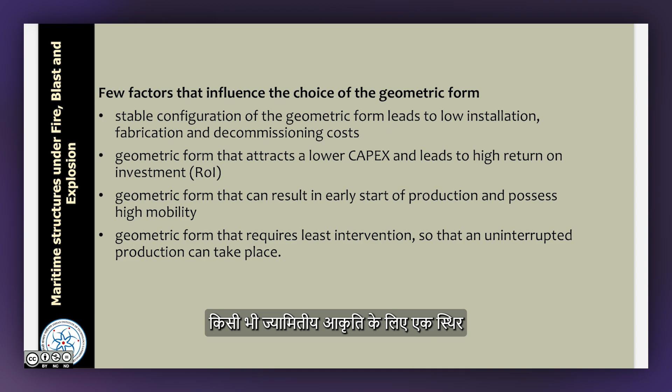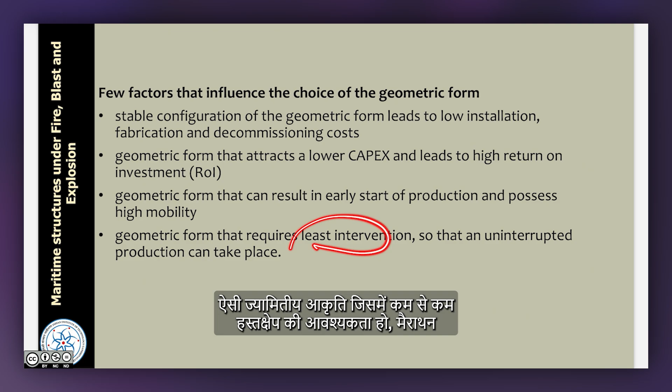Let us see which factors influence the choice of the geometric form. A stable configuration is one of the primitive requirements of any geometric form, as this helps reduce installation, fabrication and decommissioning cost. Geometric forms that attract lower capex, that is capital investment, lead to high return on investment. The geometric form should result in early start of production and possess very high mobility. A geometric form that requires least intervention should be one of the best candidates for maritime structures.

Structures are designed to remain insensitive to lateral loads. Ideally, hypothetically, I want a system which does not respond or reflect any reaction forced upon it by wave and wind loads. So the action of lateral loads arising from wave, wind, current and earthquakes should not bother my structural form in terms of design at all.

Hypothetically that is what I want, but compliant platforms are expected to resist these loads using both material strength and structural redundancy. Please pay attention to this term redundancy. These structures are highly statically indeterminate and redundant. So the design approach has shifted from strength based design, which permits very low displacements, to form dominant design which permits large displacement.

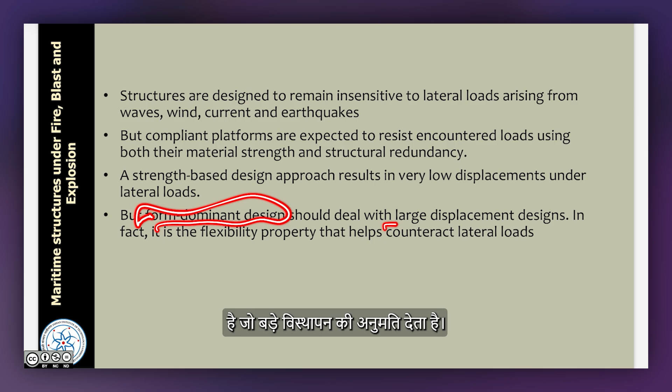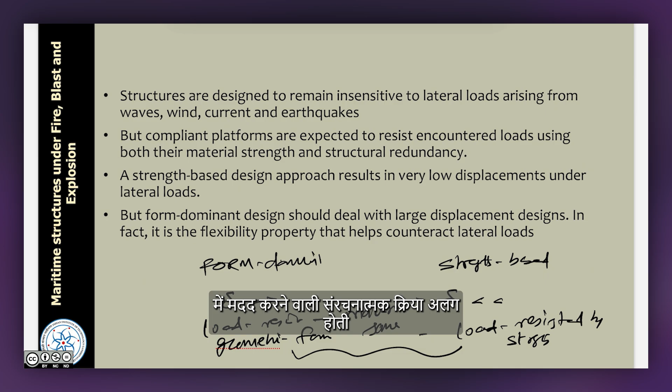So in principle, let us compare form dominant design to strength based design. In strength based design, displacements are very minimum; in form dominant design, displacements are actually larger. In strength based design, load is resisted by strength. In form dominant design, load is resisted essentially by the arrangement of members, which we call geometric form. In both cases the material may be the same, but the structural action which helps the system counteract the loads is different: here it is geometric form, here it is strength by material and member cross section. Therefore, we can say these structures are highly structurally redundant.

Compliant platforms are permitted to undergo large displacements, but they are position restrained using cables or tethers, because you need to hold the platform in place to perform its operation. You cannot allow the platform to keep freely floating. Even drill ships and semi-submersibles used for oil and gas exploration are anchored to the bed, during operation, using either dynamic positioning systems or other ways by which they are fixed to the seabed. They need to stay in position at a specific geographic location if they want to perform operations such as oil and gas production, drilling, and exploration drilling.

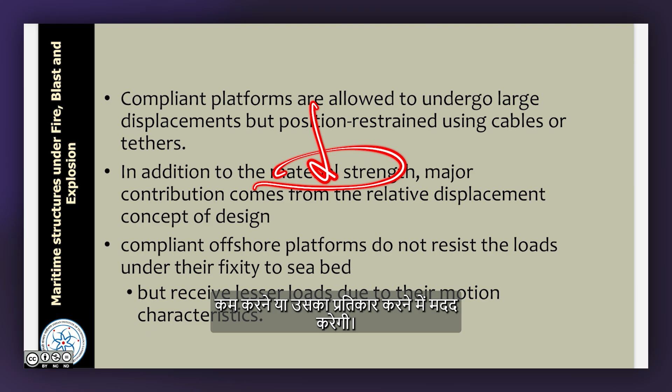So therefore, compliant platforms receive material strength which helps them alleviate or counteract the loads, but the major contribution essentially comes from the relative displacement concept of design.

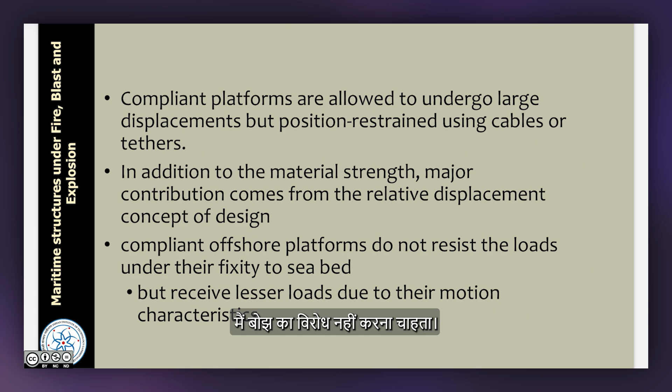However, this relative displacement cannot go to infinite value. So you have to control the displacement within the upper limits, but still the relative displacement concept which is permitted in the design is now governing the design. Therefore, in summary we can say compliant platforms do not resist loads by fixity to the seabed, but receive lesser loads due to their motion characteristics. So, very interesting - I do not want to resist the load, I want to receive lesser load. That is a design concept now.

So compliant platforms are position restrained by cables or tethers. These cables are highly pre-axially loaded tethers which offer resistance to lateral loads while counteracting the buoyancy force. Therefore, strength based design is shifted to displacement controlled design. Large displacements allowed in the design form result in necessity of recentering capability of the platform.

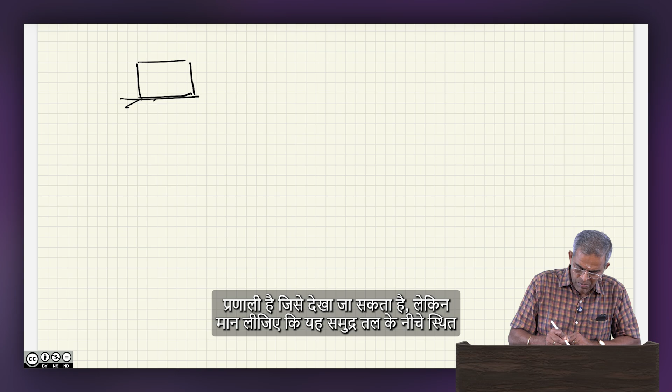So let us say what is recentering. Let us take two concepts. One, I have a structural system which is founded to seabed. Other one is a system which is floating but anchored to seabed. This is floating but anchored to seabed. This is fixed to seabed.

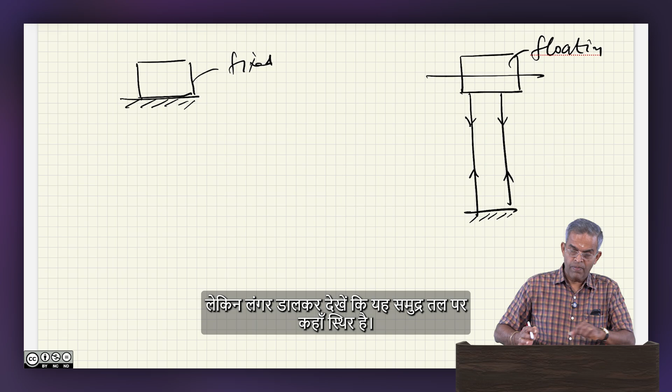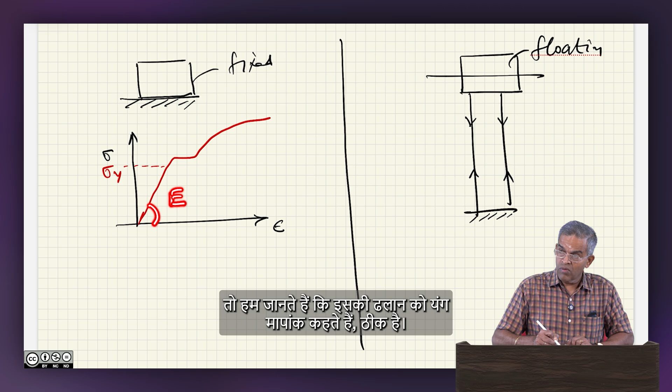Let us say I use steel as a construction material. Let me draw the stress strain curve of steel. Let us say up to this limit, I will restrict the applied stresses in the design. So we can call this value as yield strength. You will notice that the initial portion of this remains elastic - it is a straight line. So we know the slope of this is called Young's modulus. This is elastic initially, it is a straight line, linear.

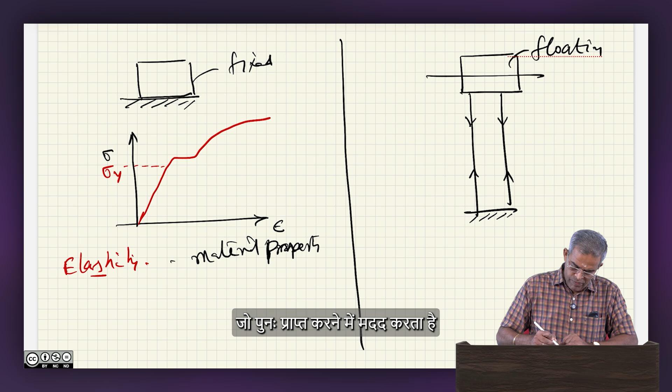So elasticity is a property of the material which enables its original shape and size regain upon removal of load. Let me write that: elasticity is the property of the material which helps to regain its original size and shape upon removal of load.

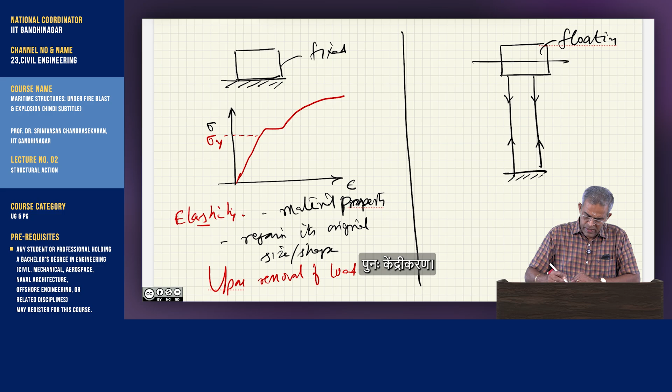Whereas recentering is a geometric property, rather system property, which helps to reach its equilibrium position in the presence of load. So very interesting friends - one is in the absence, other is in the presence. One is a material property, other is a geometric property. This is applicable to floating structures, this is applicable to fixed structures.

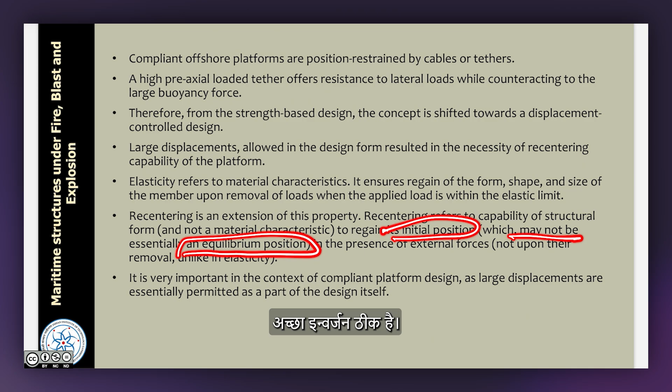So elasticity refers to material property which ensures regaining original form, shape and size upon removal of load. This is true only when the load is applied within elastic limit of the material, that we understand. Recentering is an extension of this property. Recentering refers to capability of the structural form, not the material, to regain its initial position, which may not be static equilibrium position - dynamic equilibrium position - in the presence of external forces, not upon the removal like elasticity. So one happens in the presence, it is a geometric property, other happens in the absence, which is a structural property or material property. Two things are different.

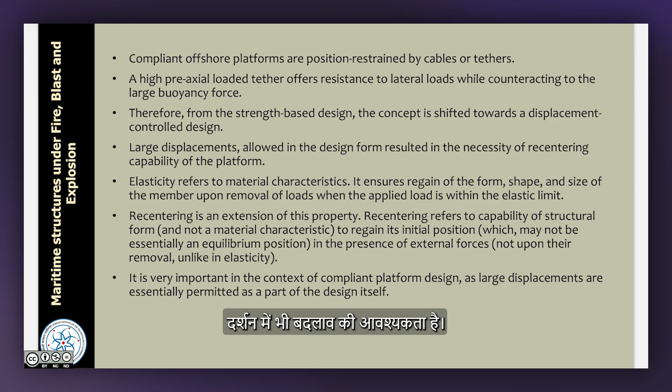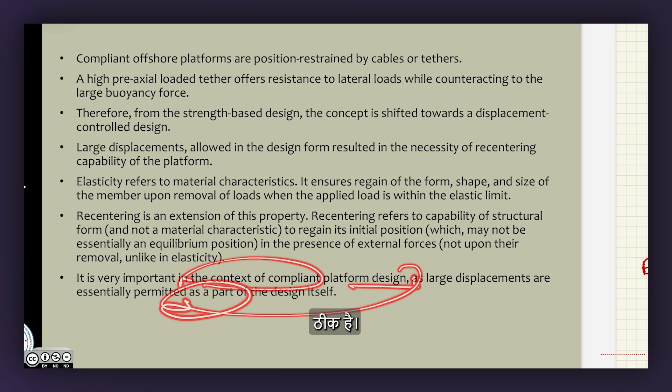So therefore, the design philosophy which is now dependent on structural action has also need to be different, they cannot be same. In the context of the design, it is very important to learn that compliant platform design permits large displacement, therefore that should be an integral part of the design itself. Recentering enables safety existence of other appurtenances such as auxiliary fixtures, risers, pipelines, electric cables, umbilical etc., which are connected to the platform. One of the fundamental differences between elasticity and recentering is that elasticity is material property, recentering is geometric property. So in form dominant design, recentering becomes very important as we go ahead.

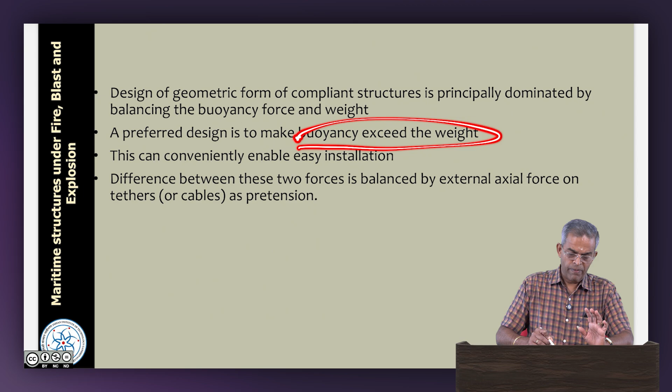So design of geometric forms, therefore in principle, is dominated by balancing the buoyancy with the weight. A preferred design is to make buoyancy exceed the weight, what we call positive buoyant systems. This can conveniently enable very easy installation, therefore the cost of installation can be significantly less. The difference between these two forces, that is buoyancy and the weight, is compensated by axial pretension in the cables. So tension leg platform design is essentially based on this focus.

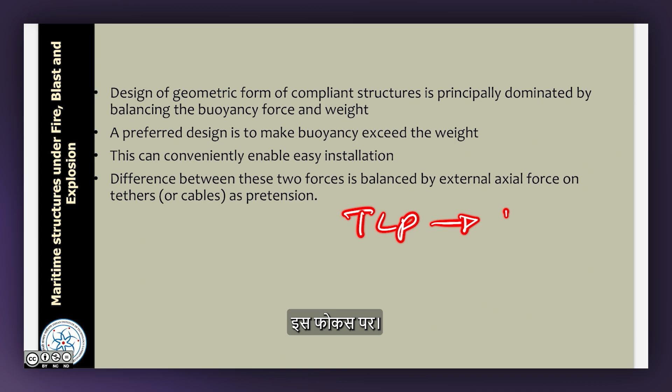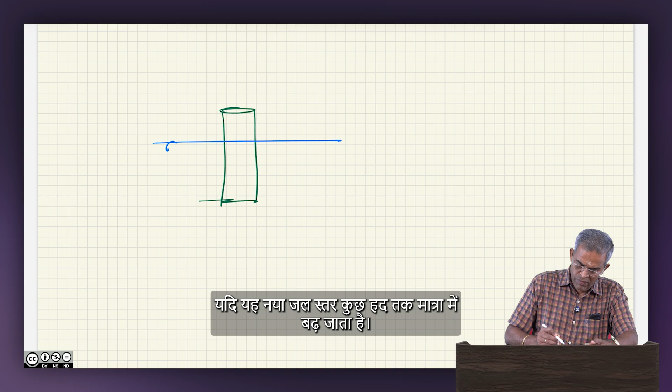Large displacements now invoke added mass presence in the body. What is added mass presence? Let us say when I have a cylinder, if this be water level, this becomes a submerged volume in the cylinder. When the cylinder is moving, let us say it takes a new position like this.

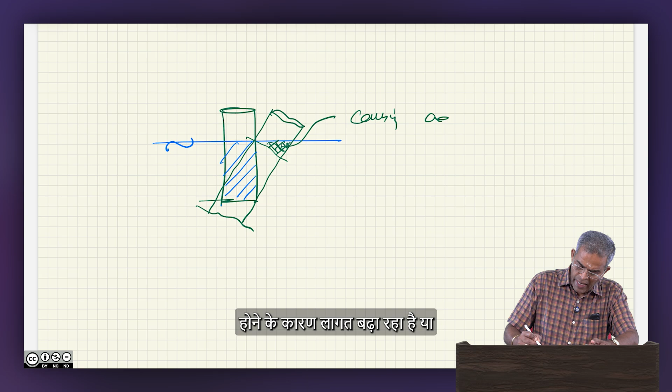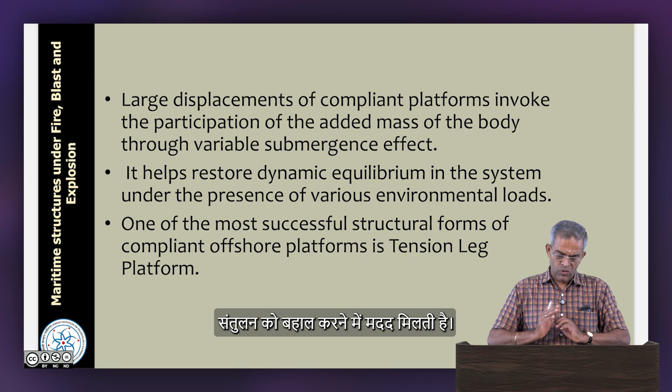This additional submerged volume is now causing added mass, because there is an additional submerged volume, and we know the mass is proportional to this submerged volume. So this additional submerged volume adds additional mass to the floating system. This added mass will be an additional feature called the variable submergence effect. This helps to restore the dynamic equilibrium of the system in the presence of forces. One of the most successful structural forms of this is the tension leg platform.

Having said this, let us move on to the structural action of different kinds of platforms. Let us take jacket platforms. We already said jacket platforms are transparent to wave and wind action. Only the members will attract forces, but the forces will pass through the gap between members. Therefore, the overall attraction of forces is lesser. The platform resists the loads by stiffness and strength, not by motion. That is jacket platforms.

Let us look at the load transfer path. When the load caused by wave, wind and current acts on the platform, the load has to go to the deck. From the deck it goes to the jacket legs, and from the legs it goes to the pile. Load has to go to the members and the pile. That is the load path.

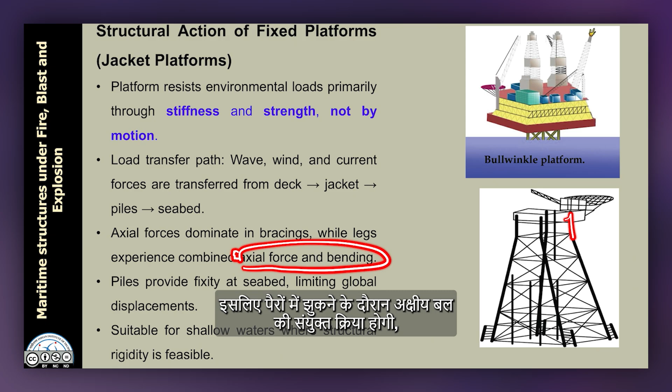Axial forces dominate in bracings, while the legs experience a combined action of axial force and bending. So the legs have combined axial force and bending, whereas the braces predominantly carry axial forces. Piles driven below provide fixity of the legs to the seabed, and therefore limit displacements. These platforms are suitable for shallow waters where structural rigidity is feasible.

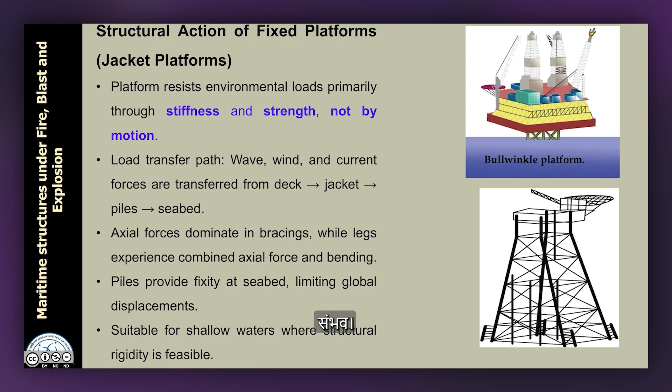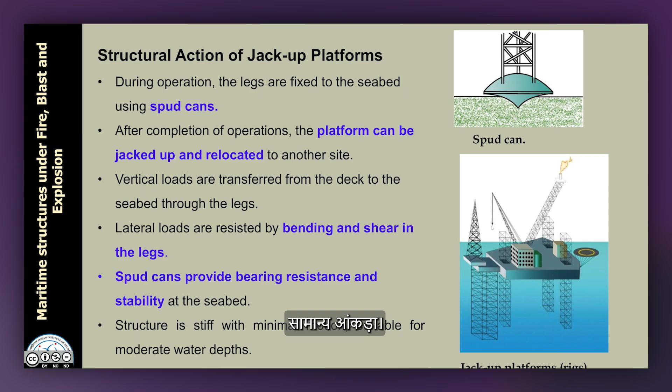Let us talk about jack-up rigs. A typical figure you see here is a jack-up rig. This is the deck which has got all appurtenances and facilities used for oil and gas exploration. When it looks like a vessel or a ship, let us say when a jack-up rig is sailing, all these legs will be kept up. That is why it is called jack up. When they reach their site, these legs will get into the water.

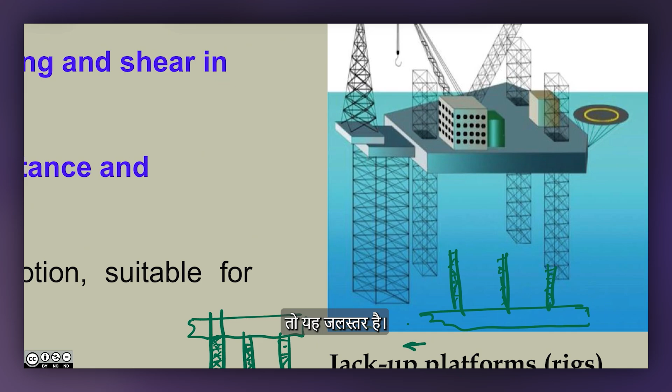So this is the water level, the still water level. What happens is, by pushing the legs down, the deck will be lifted up - that is why it is called jack up, jack up platforms. The top side contains all facilities which are very common for every offshore platform.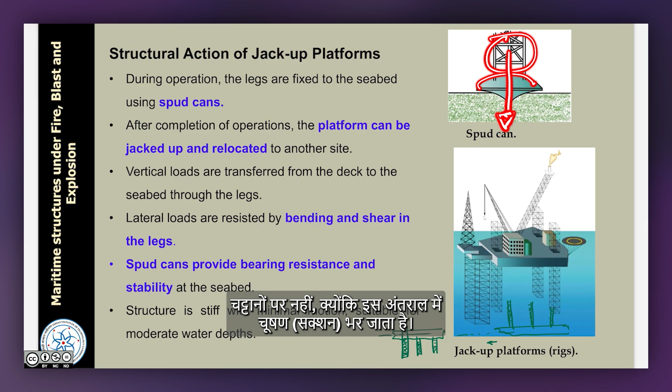So jack-up rigs essentially resist the loads through the foundation called spud can. A spud can looks like an inverted cone. What happens is this leg with the spud can is pressurized into the sand or clayey soil, not on rocks. Because of suction filled in this gap, it holds the platform. So they are fixed to the seabed using spud cans, whereas gravity platforms are fixed to the seabed by their own colossal weight, whereas jacket platforms are fixed to the seabed using piles. See the foundation difference.

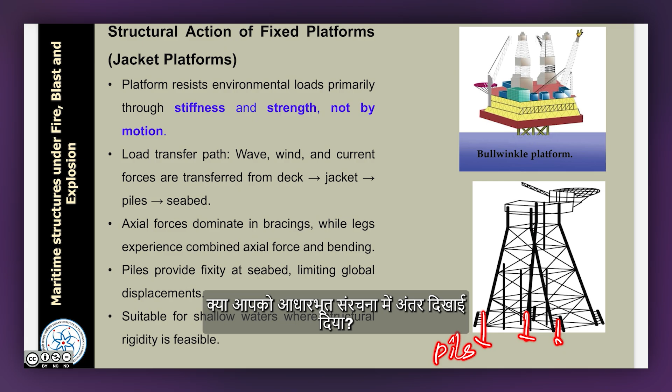So, when they move to the site, the platform is jacked up to the site. Once the operation is completed, the legs are drawn up like this and the platform is sailed to the next location.

Vertical loads of the deck are transferred to the seabed through the legs. That is the load path. From the legs, it goes to the spud can and then to the soil. Spud cans provide bearing resistance and stability at the seabed.

Let us talk about a compliant platform in general. Compliance means flexibility. This is one of the compliant platforms, where the substructure consists of a tower.

We can also connect guy wires to the tower to resist its motion, then we call this a guyed tower.

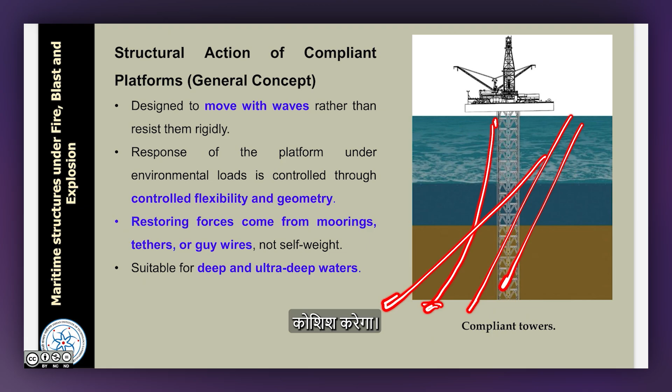They are designed to move with the waves rather than resist them rigidly. For example, if this is fixed to the seabed by a hinged connection, then when the platform swings because of wave action, let us say I have a guy wire here. When the platform moves to the right, this guy wire tries to pull it back. When the platform swings to the left, this guy wire pulls it back. So, recentering is automatically obtained by the design.

The response of the platform under these loads is controlled by flexibility and geometry. The restoring forces come from mooring lines, guy wires, or tethers, not from the self weight. Whereas in this platform, the restoring force comes from the self weight.

These towers are suitable for deep and ultra deep waters. One of the compliant towers is called the articulated tower, where the bottom is like a hinged connection called articulation.

Articulation is a hinged connection capable of rotating 360 degrees like this, but it cannot move in any degree of freedom, only rotation is allowed. This is called articulation. The typical articulation is seen here, which is otherwise called a universal joint.

This platform has two chambers called the ballast chamber and the buoyancy chamber. Ballast chamber improves stability, buoyancy chamber improves recentering of the platform. So, the tower is connected to the seabed using a universal joint.

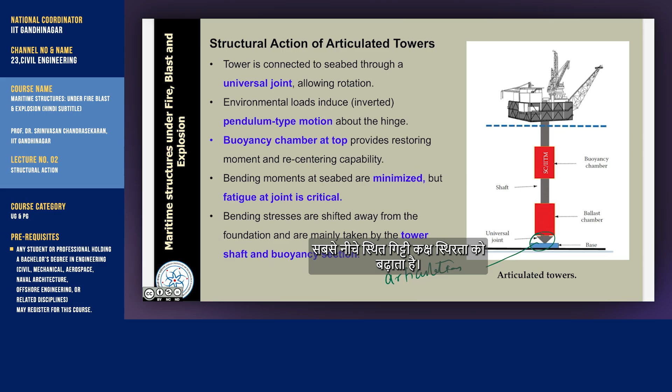Environmental loads acting on this are resisted by an inverted pendulum action, like a pendulum inverted. So this keeps dancing like this and it alleviates the loads. The buoyancy chambers on top provide recentering capability; the ballast chambers at the bottom improve stability.

Bending moments at the seabed are minimized because there is a hinged joint here; the bending moment at this joint is practically zero. The only issue in this kind of design is that the platform undergoes continuous motion, so this hinge will be subjected to fatigue failure.

So, we also have to learn about the fatigue method of design for these structures. Bending stresses are shifted away from the foundation and are now taken up by the tower and the buoyancy section respectively.

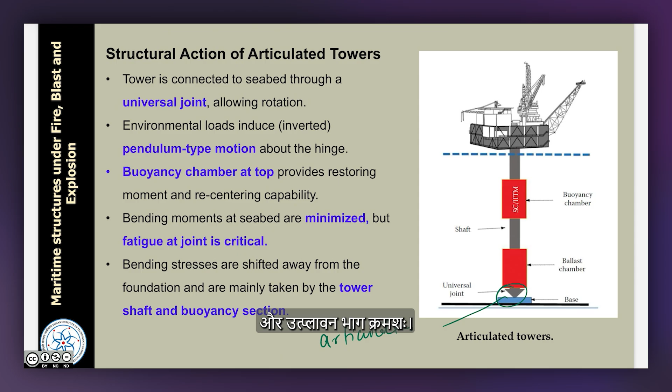Let us talk about the tension-leg platform. It is again a floating system anchored to the seabed using tethers. The design concept is that buoyancy exceeds the weight.

Buoyancy exceeds the weight. So weight acting downward plus T naught acting downward, buoyancy acting upward will be resisted by W acting downward plus T naught acting downward. So buoyancy exceeds the weight, therefore the axial tether tension T naught balances that difference. Excessive buoyancy is now balanced by axial pretension in the tethers.

Look at the structural action. If I have a system connected to the seabed using tethers, with axial tension in the tethers, and this is my still water level, when the platform moves or swings to the right...

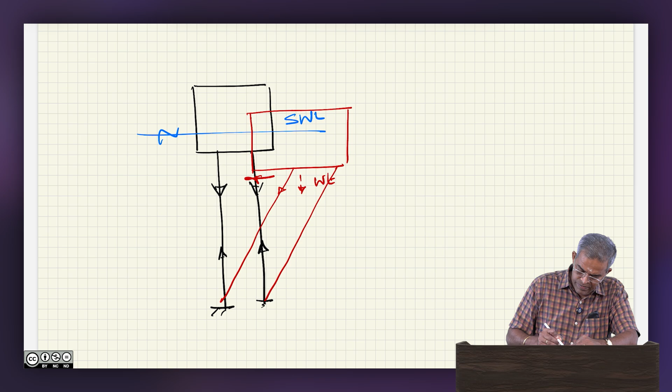If the platform moves to the right, tethers remain in the same position. If they are axially pretensioned, the vertical component adds weight, and the horizontal component pulls the platform back. So recentering is automatically done by the design.

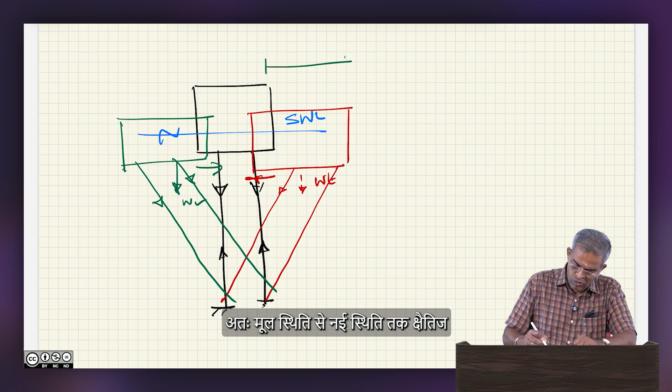So, the shift from the original position to the new position in the horizontal direction is called offset. The shift from old to new position in the vertical direction is called set down. Offset happens in surge or sway degree of freedom, set down happens in heave degree of freedom.

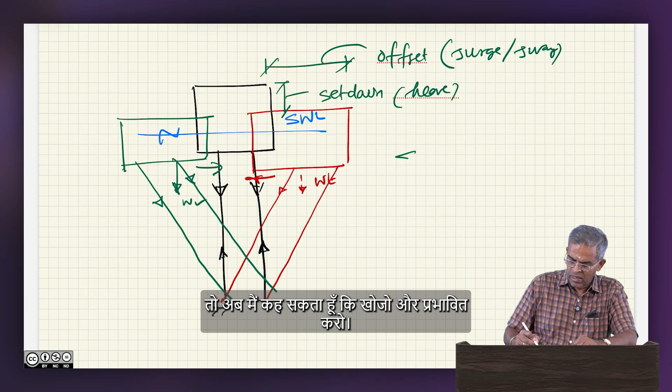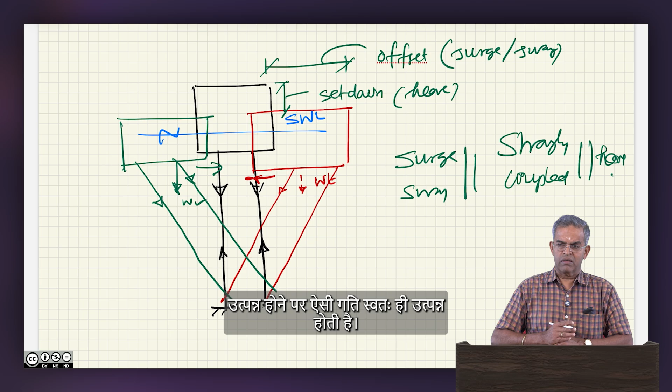So now I can say surge and sway degrees of freedom are strongly coupled with heave degree of freedom. So there is a coupling motion. When you give surge motion, heave automatically occurs; when you invoke heave motion, surge automatically occurs. This coupling action enables recentering and helps to counteract the forces. This is what we call TLP mechanics.

TLP mechanics has vertical downward movement called set down and horizontal movement called offset. They are strongly coupled. Heave, pitch and roll are stiff degrees of freedom, whereas surge, sway and yaw remain flexible. As discussed earlier, please refer to the slide. A structure that has both degrees of freedom combined is called a hybrid structure, so TLPs are called hybrid platforms.

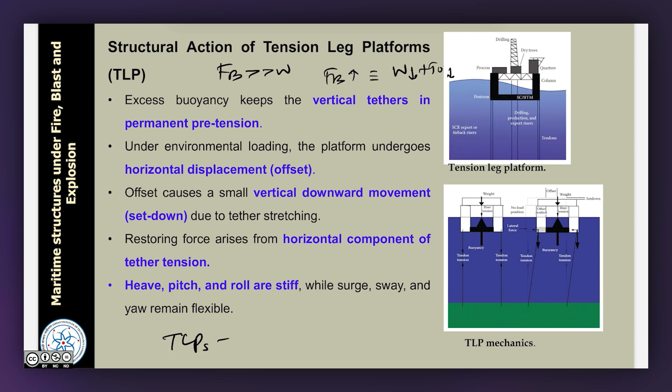Let us talk about the spar platform, a single point anchor reservoir. Spar has a substructure different from TLP. In TLP we have only tethers, whereas in spar we have a column member, which we call a deep draft chamber. Stability is achieved by this deep draft chamber and low center of gravity.

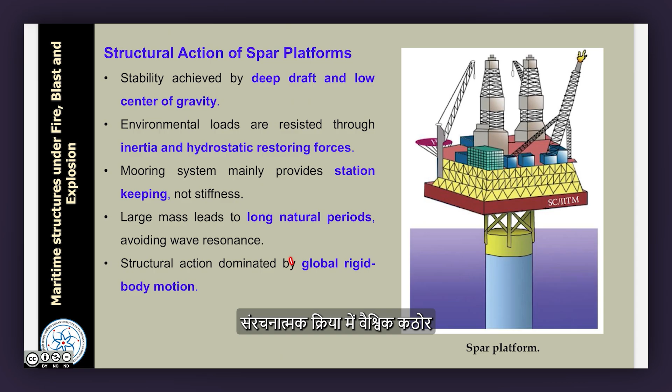Environmental loads are resisted through inertia and hydrostatic restoring force. Mooring system mainly provides station keeping, not stiffness, whereas in TLP the mooring system provides stiffness also. Here it only offers station keeping. Large mass on the top side leads to long natural periods, which avoids wave resonance. Structural action is dominated by global rigid body motion.

Let us look at the semi-submersible platform. Semi-submersibles are also one of the platforms used for oil and gas exploration. It has reduced waterplane area, which minimizes the wave induced forces. Loads are transferred through the column members and the pontoons to the mooring system.

The platform relies on hydrodynamic transparency rather than stiffness. The design concept has moved from strength based, stiffness based material characteristics to total geometric form, which comes from floating platforms like semi-submersibles. The load is resisted purely by hydrodynamic transparency and not by stiffness. Response is generated by the coupled heave, pitch and roll motions. Mooring lines ensure position keeping and not rigidity. One important problem with this kind of structure is fatigue because of cyclic waves on the vessel or on the drill ships.

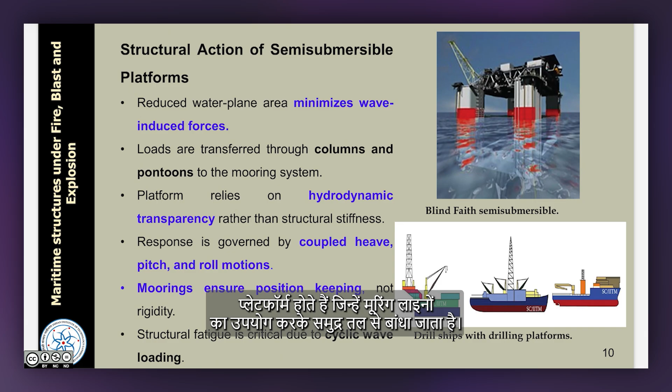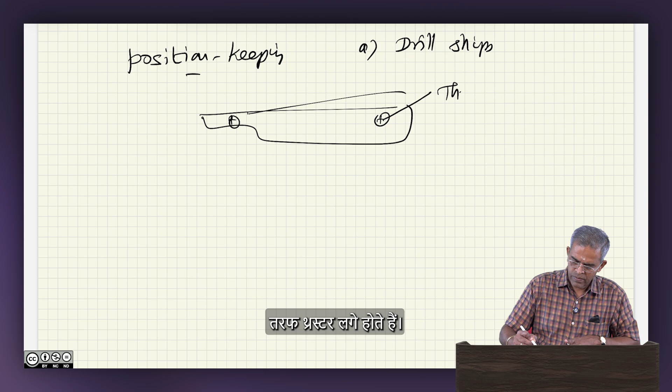Drill ships and semi-submersibles are completely floating platforms which are anchored to the seabed using mooring lines. When you look at the method of anchoring them, let's say position keeping, consider drill ships. They have thrusters in the fore and aft of the vessel, in the direction of motion of the vessel.

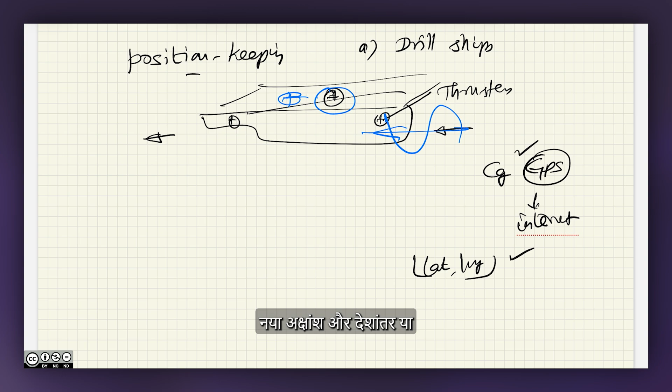On the deck they have a global positioning system fixed, which is connected to the internet. So when the platform moves, the latitude and longitude coordinates of this point are known. Further, under wave action, if the platform moves, this center of gravity moves to a new point, and the new latitude and longitude are known. The difference between delta x new to delta x old, delta y new to delta y old is computed, and the thrusters will apply forces to push or pull the drill ship to the new position.

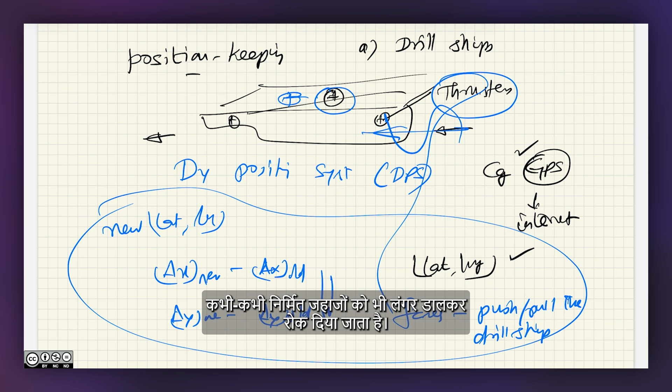This arrangement is what we call a dynamic positioning system, in general DPS. Sometimes drill ships are also anchored using mooring lines; they can also be used. However, to facilitate the operation of drilling, drill ships must be position restrained either using a DPS or using mooring lines. So the alternates are DPS or mooring lines.

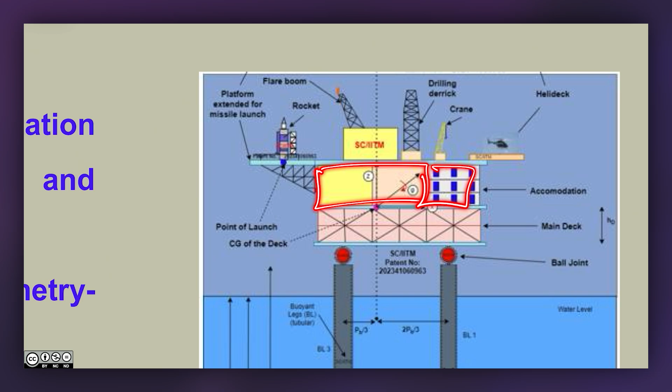Let us look at the last one, a new generation platform called Triceratops. Interestingly, look at the platform: the top side has all the facilities an offshore platform should have, for example a drilling derrick, a crane, a helipad, a flare boom, living quarters and accommodation, then the main deck which has electromechanical equipment, compressors, machine room, etc, and a drilling derrick used for drilling operations. So the top side is almost the same as that of any platform.

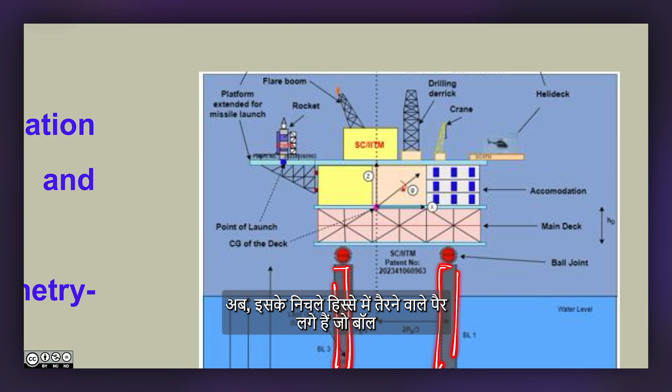The bottom has buoyant legs which are connected to the top side using something called a ball joint. The advantage of the ball joint is that when the platform is rotating under wave action, this rotation at the legs will be absorbed by these ball joints and not transferred to the deck. Under wind action, if the platform is rotating, these ball joints will absorb the rotation and not transfer it to the legs. So the moment at this connection practically becomes zero, or rather equal to some value m star, for which these joints are designed.

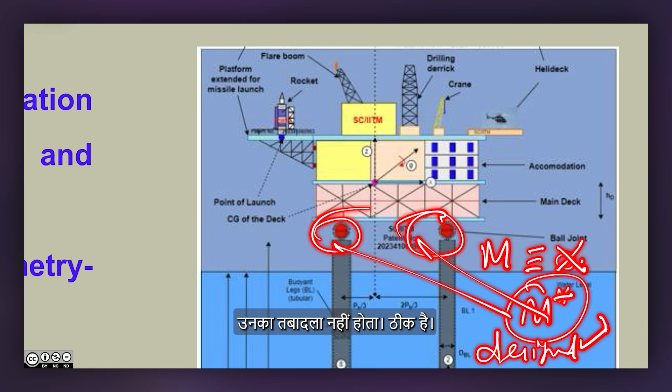They are not transferred. So we can say the Triceratops is an example of a partially isolated system. Why partially, not completely? Because any surge motion or heave motion will be transferred from the leg to the deck and from the deck to the leg.

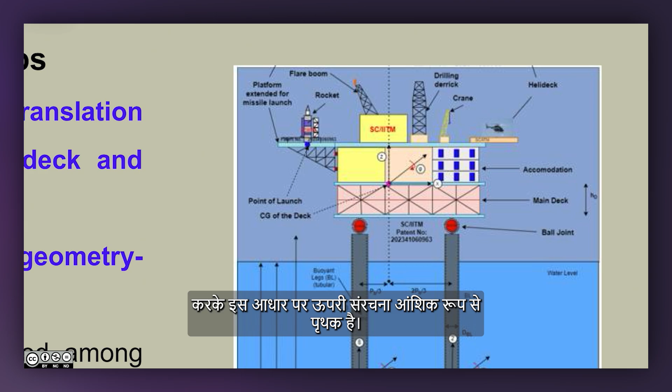So the restriction is not on displacement degrees, but only on rotational degrees. Therefore, the superstructure is partially isolated from the substructure using ball joints, which allow translation but isolate rotation. The structural action of this platform

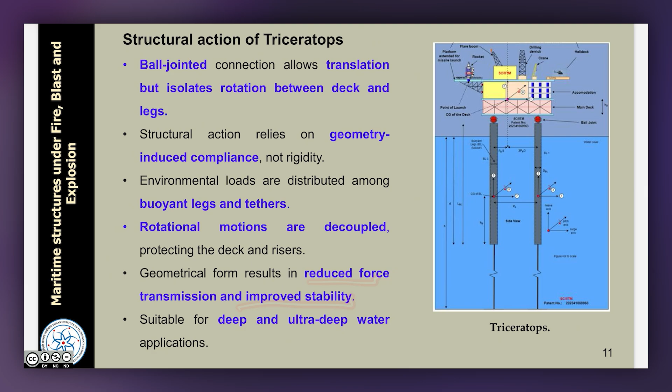essentially depends on geometry induced compliance, not on rigidity. The loads acting on the platform are taken care of by the buoyant legs and the tethers. The rotational motions are decoupled, which helps protect the deck and the risers. This geometric form results in reduced force transmission and improved stability of the platform.

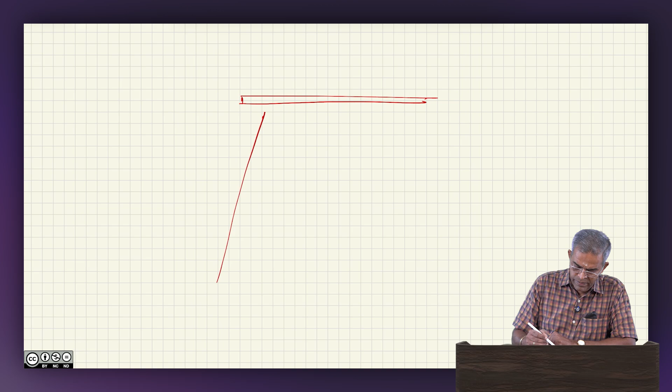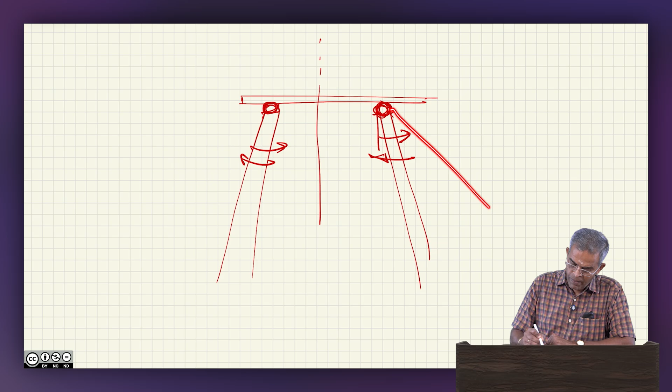Like for example, if I have a deck and a buoyant leg connected by a ball joint, with respect to the CG, the legs have freedom to move or rotate inward and outward. If they rotate too much, the stress at this joint will become beyond its design capacity. Therefore, they need to be supported.

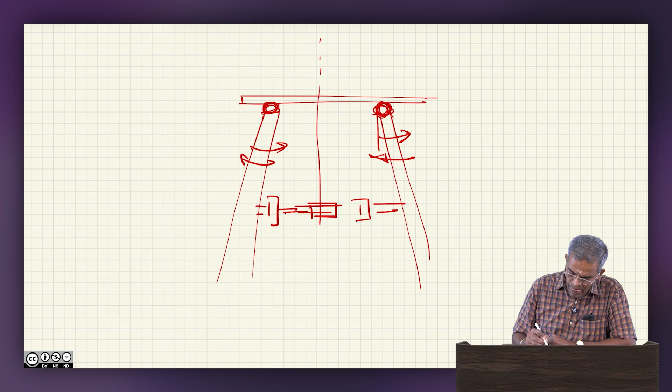So what we do is interconnect these legs by a central system, and in this system we introduce a spring mass damper. These passive dampers will restrict the outward swing of these legs. So they are called response control mechanisms, which you see here.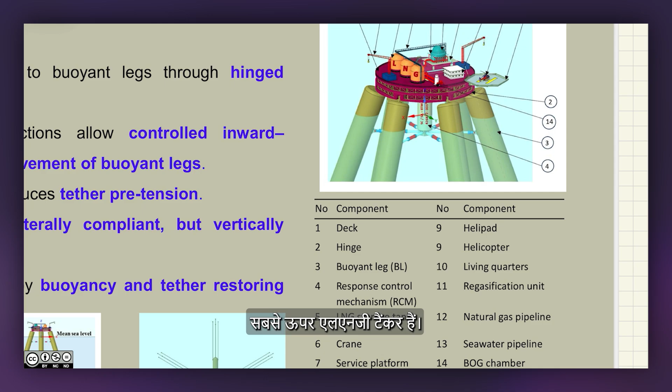This platform also holds the LNG tank on top, the LNG tankers on top, a crane, helipad, living quarters, flare boom, and also the regasification unit. All these are housed on the topside of the deck, and the deck rests on the hinged joints which are mutually connected between the leg and the buoyant legs.

It is again a classic example of a partially isolated maritime structure. The hinge connection allows controlled inward-outward movement of the buoyant legs, and therefore the passive control helps reduce the response of the buoyant legs.

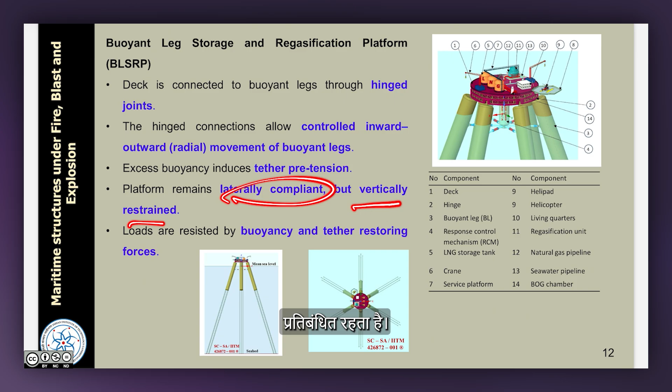The platform remains laterally compliant but vertically restrained from motion. So the heave degree is rigid, but surge and sway degrees are compliant. The loads are resisted by buoyancy and tether restoring forces. That is what you see in this platform.

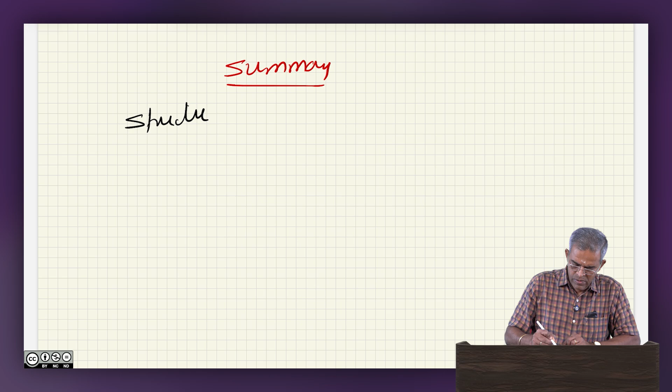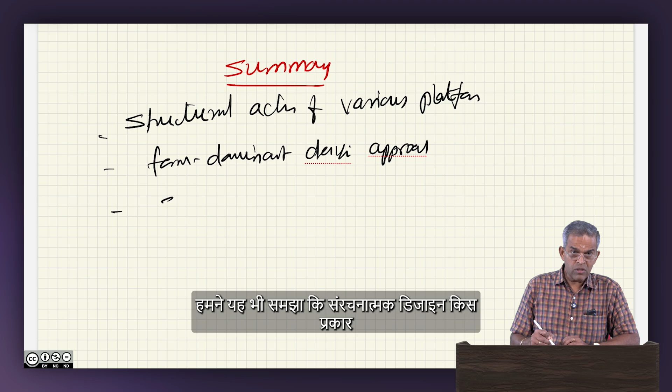So friends, in this lecture we learnt about the structural action of various platforms. We also learned more about the form dominant design approach, and we understood how the structural design has shifted from strength based to geometric based design. There is a shift - the moment we say geometric based design, it allows excessive displacement, so these displacements should be controlled.

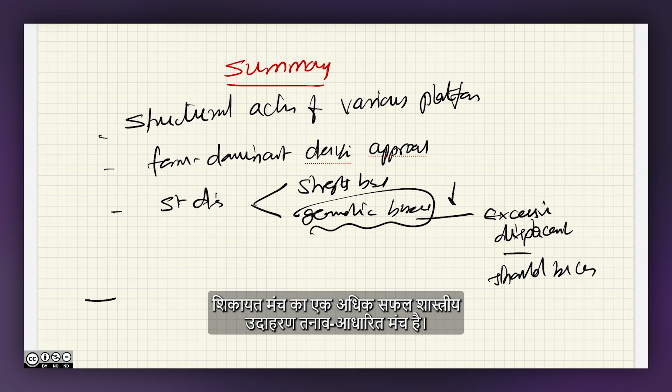The classical most successful example of a compliant platform is a tension leg platform. We clearly understood what TLP mechanics is, how surge, sway and heave are coupled, and in this process we learnt how recentering is invoked.

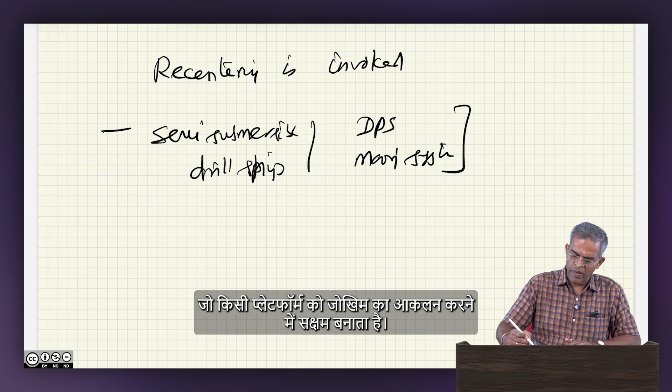Then we moved on to learn semi-submersibles and drill ships, where we learnt about the dynamic positioning system and the mooring systems, which enable a platform to maintain position restraint, necessary to carry out offshore drilling operations.

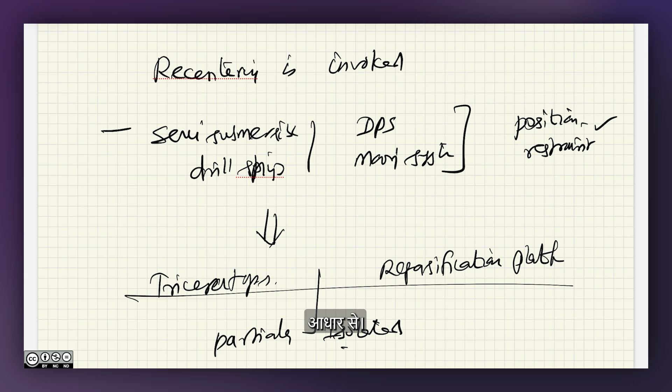Then we moved on to advanced structures like Triceratops and regasification platforms, where the superstructure is partially isolated from the substructure. Friends, one important merit of this platform is that it is now being investigated for rocket launching for satellite communication rockets from the sea. Since the superstructure is partially isolated, the thrust force or the recoil effect generated from the rocket launch does not affect the substructure.

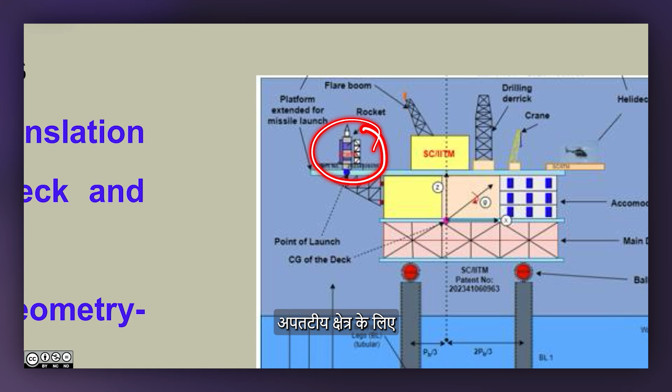So now there is very interesting advanced research going on in analyzing and understanding the feasibility of using this platform or such platforms for offshore satellite launchers. So friends, we have also learnt about advanced systems as we go ahead.

So now we learned the structural action of fixed type, compliant and floating type structures. We understood that the design philosophy is different for these kinds of structures. Whatever load acts on them, the design philosophy must allow large displacements in its format. So we learnt this.